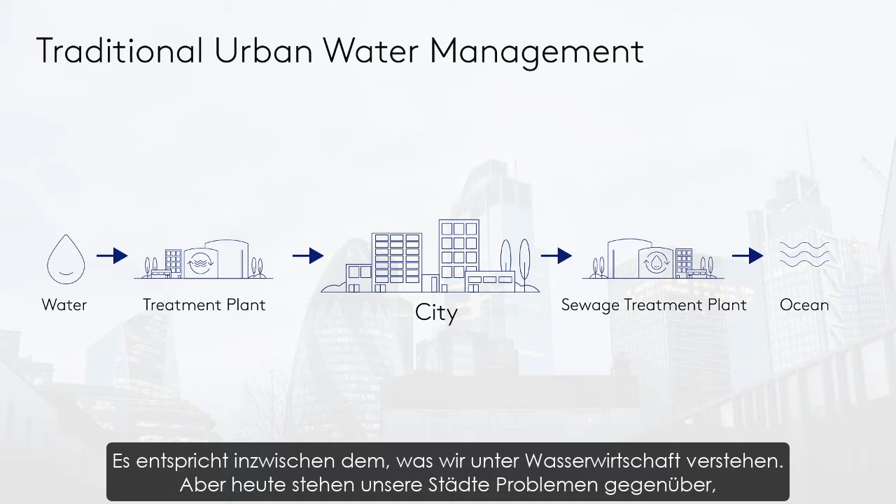And it's very good so far as it goes, but we're now seeing a lot of challenges in our cities that we need to address that aren't covered by that model. So it didn't consider things like the rainfall that was landing on the buildings in the city and how we might use that. It didn't really consider the whole issue of stormwater. They just included stormwater in their wastewater management, which has created another set of problems for their creeks and rivers.

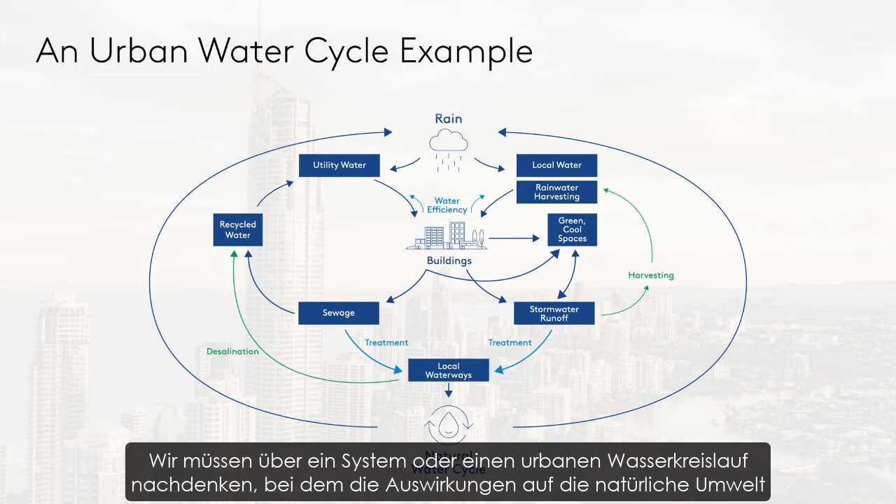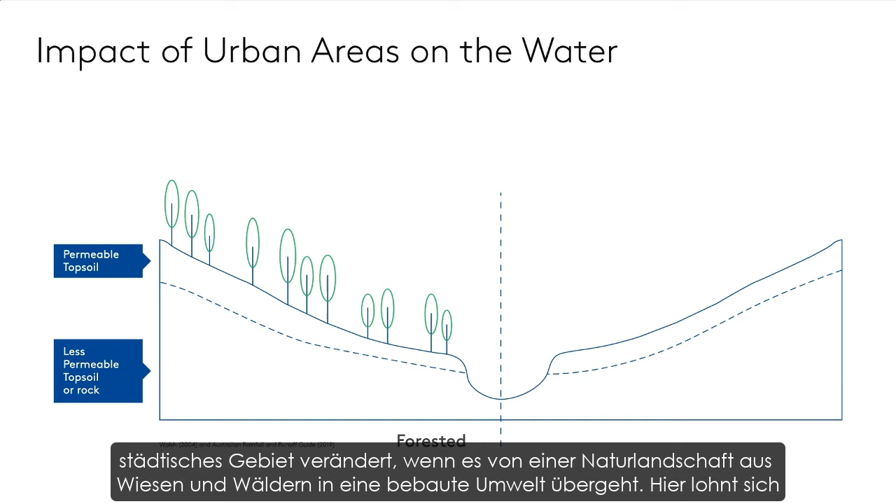So we think we need to change that language a bit. We need to be talking about a system, an urban water cycle that's happening, more discussion about the impact on the natural environment, and then obviously how buildings become part of that. And in order to understand the important role of buildings, we really need to look at how an urban area changes when it goes from a natural landscape, which is mostly grasses and forests, to a built-up environment.

And it's interesting to look at the numbers here. So in a more natural landscape, the landscape retains about 80% of the water. And that either infiltrates into the soil and becomes groundwater, or it evaporates and has a cooling effect, but it also becomes water vapor and can land again as rainfall. When we urbanise, we see a very big shift. Instead of 80% of that water being retained, 80% of the water becomes runoff. So it very quickly runs off that landscape.

So we have quite negative impacts on our waterways. We see flooding, and we see scouring and a loss of that ecological habitat. But we also don't see groundwater. So the base flow, when it's not raining, we see a lot less flows in those local waterways. And we also don't see the levels of evaporation and evapotranspiration that have a really important cooling effect for our cities, but also create more rain.

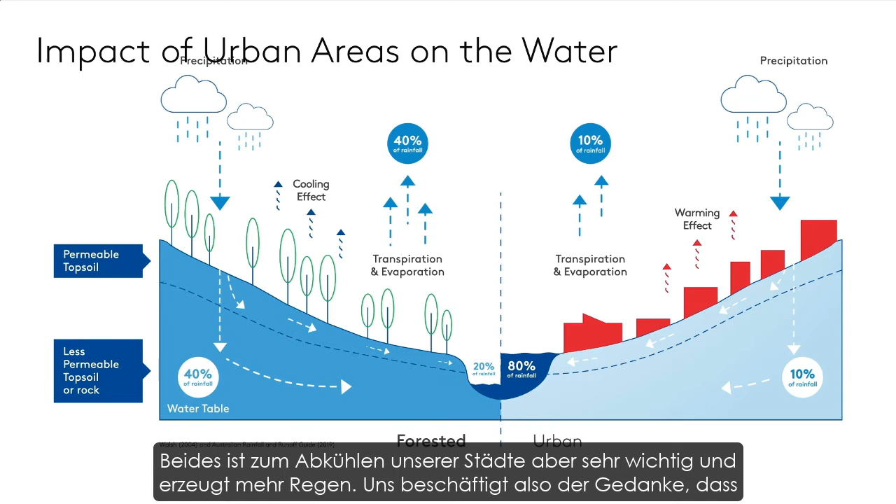So, one of the ideas that we start to talk about is that our cities are becoming deserts. We're seeing less rainfall, they're getting hotter and drier, and when it does rain, we're seeing flash flooding. So it's a pretty negative image, but it's one that we need to think about. And the great thing is that buildings can then become part of the solution and address all of those impacts to replicate that natural environment. That's a great segue. Thanks, Michael.

So if we did want to take a look further at the buildings, I think it's worthwhile to take that thought that buildings are part or can be part of the solution rather than part of the problem. And that by changing the way that water is managed at an individual scale, at a single building or in a suburb or a town or at a wider scale, we can actually change the impact of a whole city and a built environment on the natural environment.

So we see an example of this where we're now using a lot of decentralized solar PV to generate electricity. So we don't need to rely on a great big infrastructure solution, and we can get small inputs coming into the system in the local area with less transportation and less infrastructure required.

We can use our buildings and think about our buildings in three different ways. The first being that we make them more efficient than they were before, so they consume less inputs from the external world, and that's things like insulation for power and heating, cooling costs there. But in a water sense, it's things like water efficient appliances, shower heads, taps, washing machines, things like that.

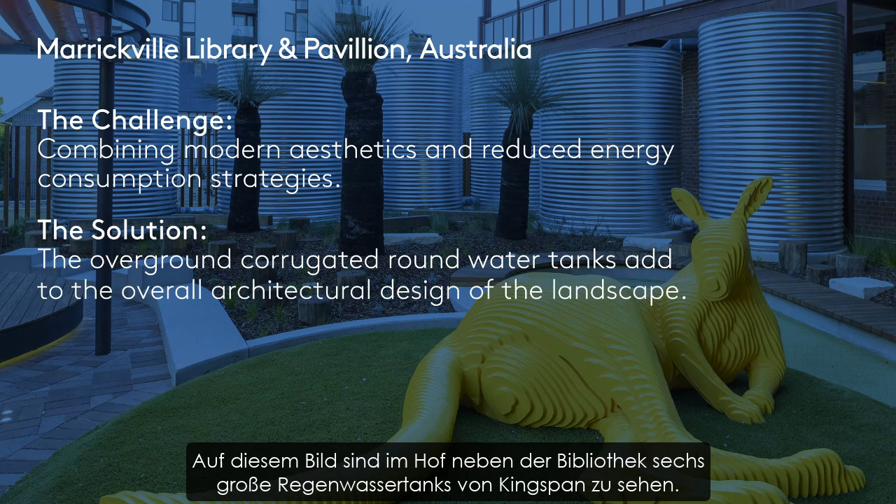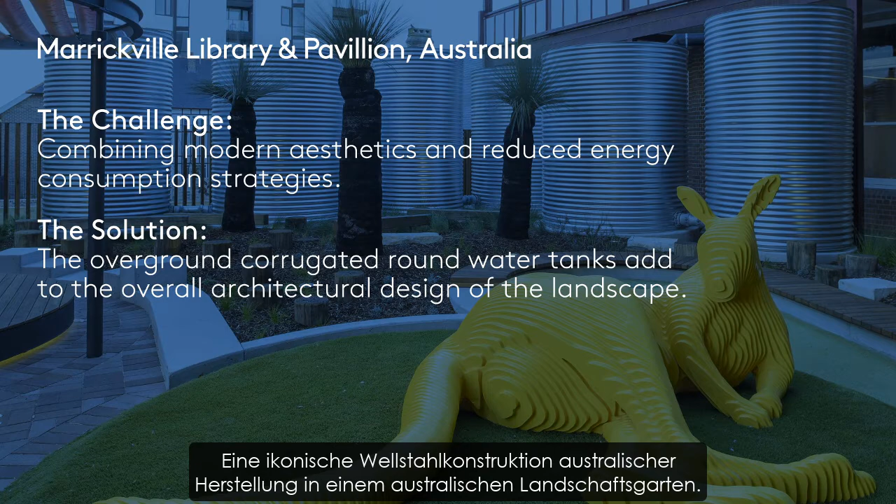And here in the picture you can see in the courtyard next to the library they've installed 6 large Kingspan rainwater tanks. This is an iconic Australian corrugated steel product in an Australian native landscape garden there. The 6 tanks store about 57,000 litres, capturing water from the roof of the library and filling up those tanks there. And then the water is reused into the public toilets and facilities inside the library there.

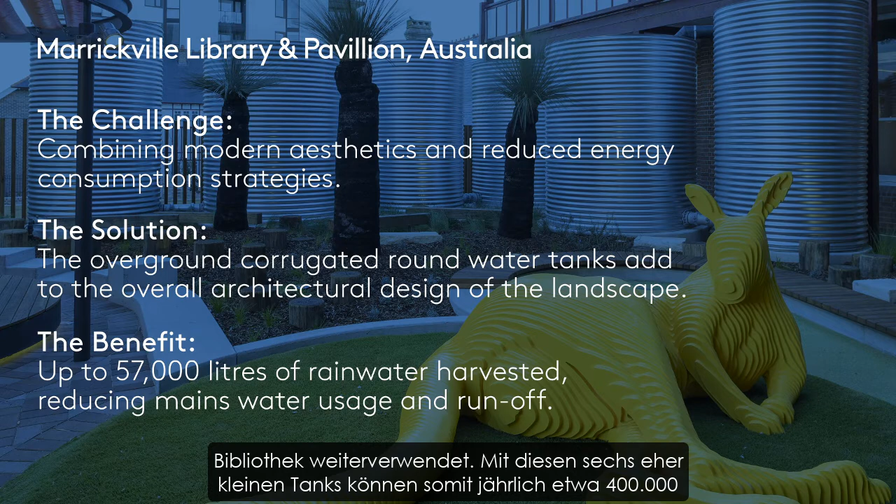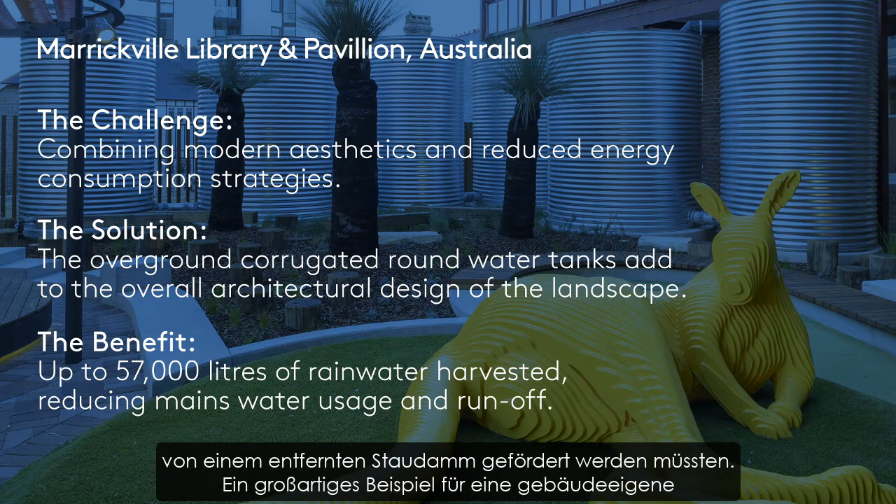So these 6 relatively small tanks have the ability to save about 400,000 litres of water a year that would otherwise have been piped in from a dam many kilometres away. So it's a really great example of reusing the water on site where it falls without having to treat it and without having to pump it long distances.

This site also, when these tanks overflow, which they do a few times a year, the water from that runs into an underground stormwater retention basin and is further slowed down and treated before it's let into the stormwater network. So it's quite a good integrated system there, and we've got a really visible example of using rainwater where it doesn't need to be hidden away, and it's part of a feature of a landscape garden as well. Yeah, it works well.

And then they transfer the water up into a header tank in the attic space, and then the water is released by gravity down to flush the toilets through the whole building, and I think used for some irrigation in the gardens as well. So this is a really compact lot scale example of stopping the rainwater from leaving the site, reusing it through the appliances in the building, and just minimising the impact of that development on the natural environment.

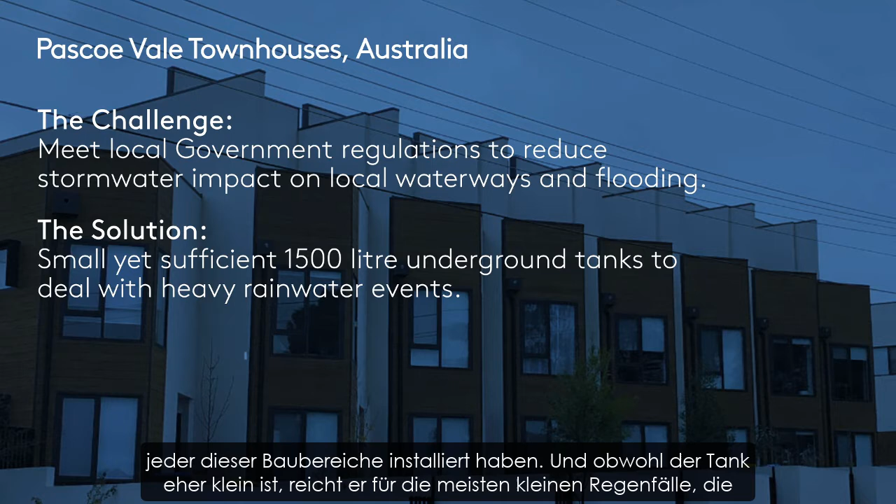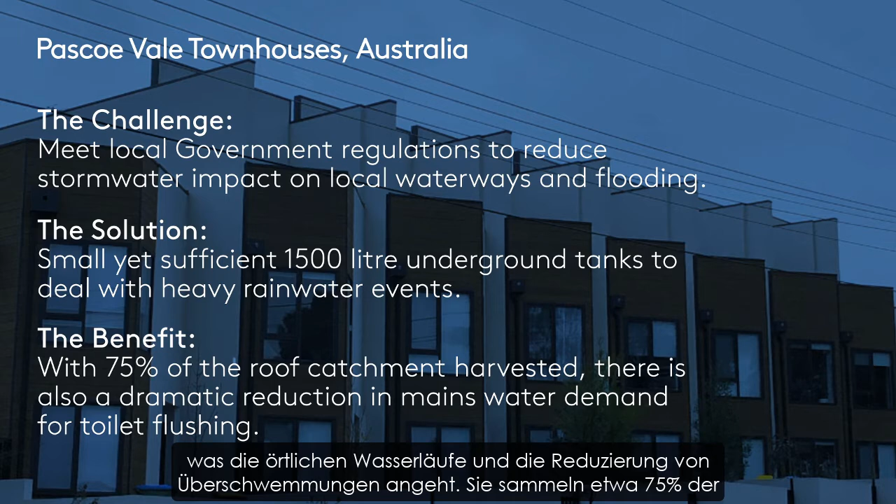And that, although quite small, is sufficient to deal with most of the small rain events that occur on that site, and has a really important difference to the quality of the water coming off it and the volume of the water coming off it in terms of local waterways and reducing the impact of local flooding. So they capture about 75% of the roof area into those tanks.

That's excellent. So Stuart, we've talked quite a lot about the design of buildings. Kingspan have been in this space for a long time. Can we talk about some of the stuff that we do that can improve the impact that buildings have on our environment? Yeah, absolutely. So I think we've talked a lot about rainwater harvesting, and Kingspan is a major manufacturer of rainwater harvesting products. So we produce a range of above ground and below ground rainwater storage tanks, as well as some quite large storage tanks for more industrial and agricultural purposes.

We've got a range of storage tanks then in the agricultural space for fertilizer and fuels as well. And in the water space, more generally, we've got integrated underground systems for stormwater and also for pump stations and water transfer. And then we've got some specialized stormwater products for separating oil and other particles out of stormwater networks. We've also got a wastewater treatment product, which is industry leading for treating on-site wastewater.

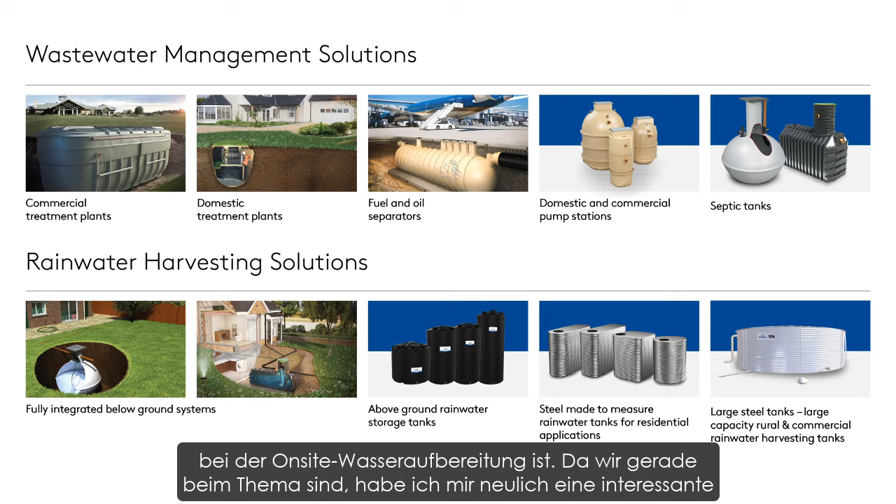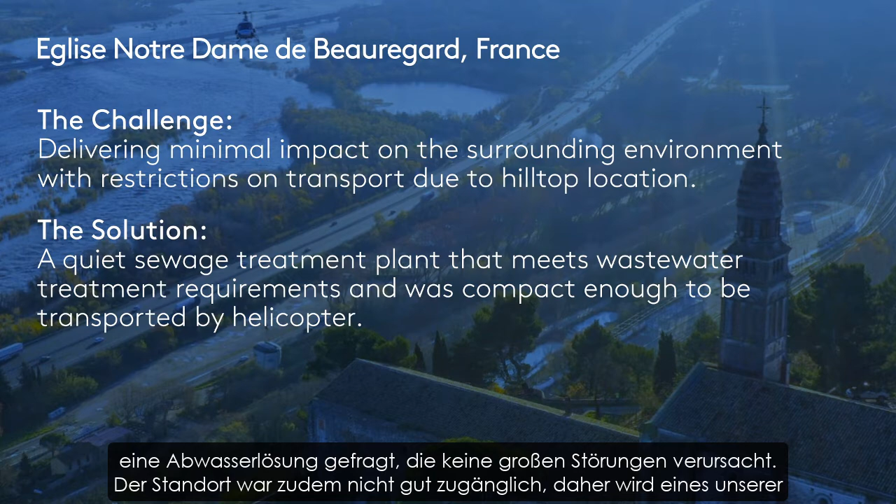Actually, on that, I've been looking at some material and a really interesting design solution. So I think it's an old church with a restaurant and two artisan studios, but it's set in these beautiful grounds, which are obviously environmentally quite sensitive. So they needed a wastewater solution that didn't have a big impact, and they also didn't have good access to the site. So there's a helicopter bringing in one of our biodisc systems, and it's really quite nice, I have to say.

Okay, well, Kingspan this year has launched a massive initiative called the Planet Passionate. This is a 10-year program for initiatives in climate. So it's really to address three major global themes on the environment, being climate change, circularity, and the protection of the natural environment. So it's really exciting for us to be part of this program and to really be involved in it.

In particular, one of the targets is around rainwater harvesting, and the target we've set is that in 10 years we will be saving 100 million litres of water a year through rainwater harvesting on Kingspan facilities. So at the moment there's over 100 buildings that Kingspan owns around the world, and we've already started to install rainwater tanks on these buildings. I've been in this industry for quite some time, and I've not heard of a world program like that before. So it's exciting to be part of something that's quite ambitious.

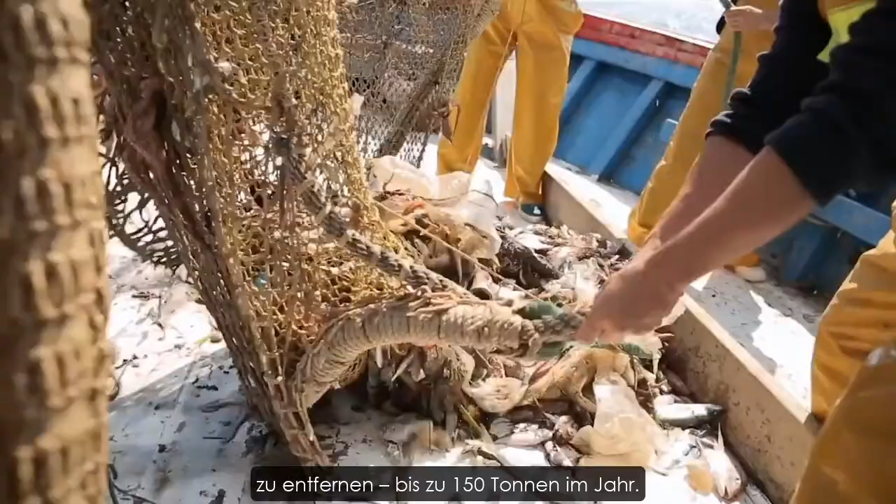The water theme is continued also. We're quite concerned about the oceans, and we've joined with a not-for-profit group called Ecoalf, and they're working with fishermen in the Mediterranean to retrieve a lot of plastic waste from there. We're looking at up to 150 tonnes a year. So we're going to be doing that, and we're also looking at doing 4 ocean cleanups by 2025. Wow, thanks, Michael. That sounds like a huge project.

Just to talk about some examples of the rainwater harvesting target on Kingspan's own buildings. So firstly, we want to look at the Icon building in Kingscourt. This is adjacent to the Kingspan Group headquarters there. We recently developed this new building using a lot of Kingspan's own products as a showcase of the kind of design that's possible now using modern building materials. And as part of that design, we've installed rainwater tanks in the basement of the Icon building, and those tanks are capturing the water from the roof of the building and reusing that through the toilets in the building. So just to showcase exactly what's possible on a nice, neat, architecturally quite good looking building in a countryscape in Ireland.

The Kingspan Water and Energy Facility in Rokietnica in Poland has also already installed rainwater harvesting tanks there. So in that situation, they got a 20,000 litre tank connected to about 3,500 square metres of factory roof area. So there's enough roof area there with even modest rainfall in that region of Poland for them to refill that tank, I think about 80 times a year. Again, that water is being used back into the toilet block in the building, so all that water is reducing consumption of the mains water that was otherwise being used.

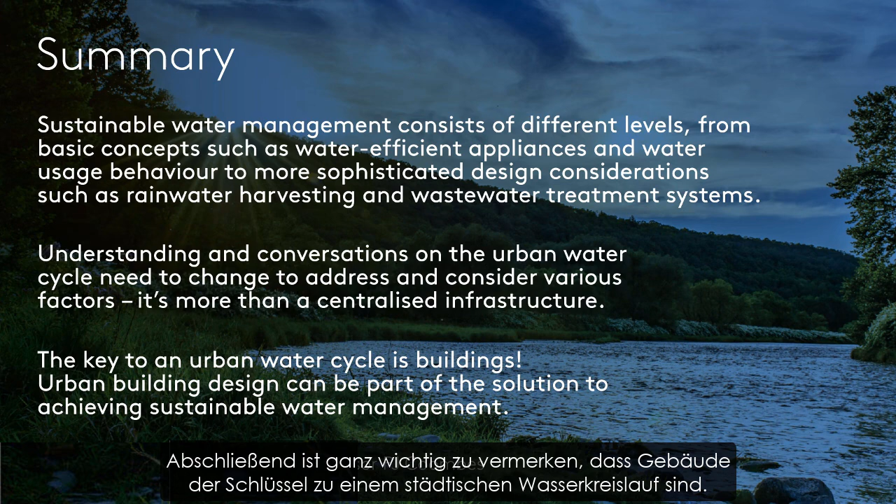Thanks, Rod. Just to summarise then, what we wanted to cover off here was talking about sustainable water management and making sure we have a clear understanding of what is meant by sustainable water management. Also really understanding the urban water cycle and trying to change the conversation around what an urban water cycle is, and understanding that it's more than just a centralized infrastructure, and there are a lot of inputs and outputs and varying factors on an urban water cycle. And lastly, probably most importantly, the key to an urban water cycle really is the buildings, and it is possible for buildings to be part of the solution and not just the problem.